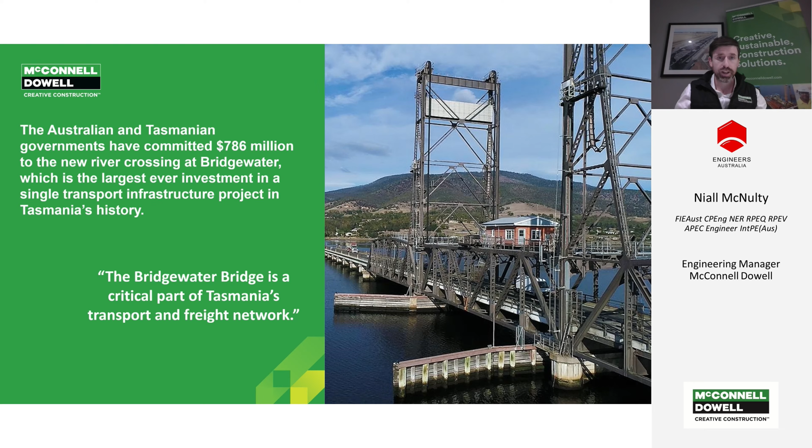So some of the benefits and what the new bridge will bring, it's essentially filling in a missing link where we've got motorway or dual carriageway standard roads on either side of the River Derwent, north of Hobart. And the bridge will create 2 lanes in each direction and have interchanges both north and south of the river at Granton and Bridgewater.

And the features are really to bring the speed up to 80 kilometres an hour from the current 60, a shared path for pedestrians and cyclists to create greater interconnectivity between Bridgewater and into Hobart. The navigation clearance will be consistent with the Bowen Bridge downstream, which will allow for unimpeded access upstream of the river, which is currently not the case. Further grade separated interchanges, the Brooker and Lyell highways, and really upgrading the connection to local highways, off to the west, and the local community in Bridgewater and Granton itself.

So how do we build a bridge? We'll play a short video to really set out how we've gone about constructing the bridge from start to finish. The detail within the presentation will focus on the early part of that story with regards to setting up the marine access, how we've got out into the Derwent estuary, and then how we've delivered the piling works to build the foundations for the bridge. But the video will give a really good synopsis of what the bridge entails, what it is we're trying to do, and how we're going about it.

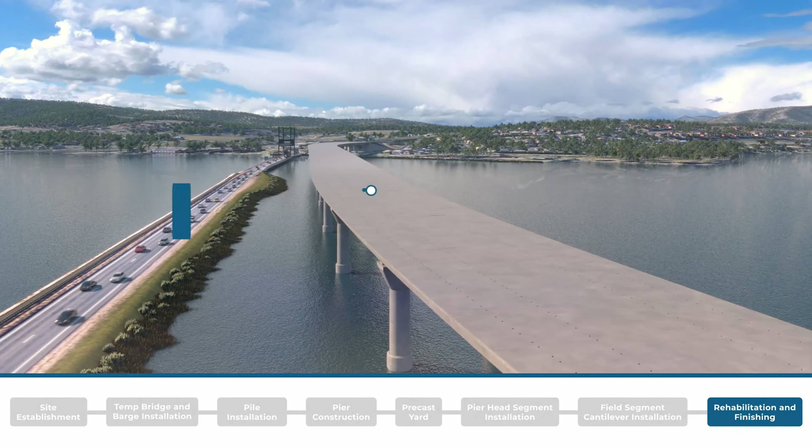So hopefully that video gave you a good overview of what it is the project is trying to achieve. So we'll get stuck into a bit more of the detail around what are the particular challenges that this location and this project have brought to us.

The new Bridgewater Bridge sets out to provide a smooth interconnection between north and south of the River Derwent and connect the communities there inwards into Hobart. Our goals for the project are to maximise that interconnection with local highways, minimise the impact on the existing causeway and the existing road users, minimising impact on the local community in general during construction, and maximising the speed limits as we go through there, keeping the traffic flowing.

Within the Derwent estuary itself, we do have a lot of environmentally sensitive receptors, including flora and fauna, a lot of black swans in the area. Seagrass is an important habitat for the local fish population. So we had set out to construct with as minimal an impact as possible on both the people and the environment in the local area.

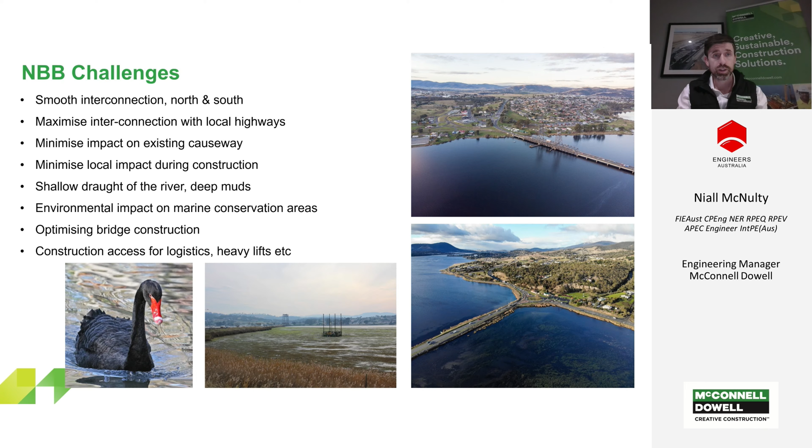There's a view of the Derwent looking to the south. The existing bridge is to the right-hand side. It's a piece of engineering heritage for the country, built in 1947. I believe it was one of the first welded bridges of its kind, and it essentially has a raising and lowering section in the middle to allow marine traffic through.

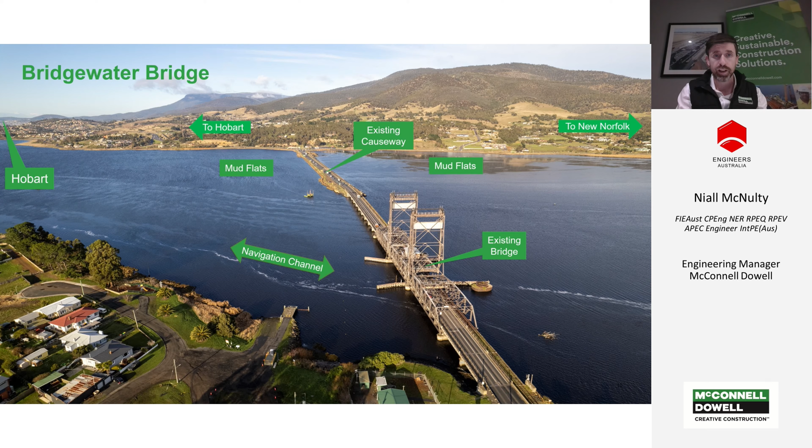You can see in the foreground on the Derwent, it's got a navigation channel which is slightly deeper. The majority of the width is across the mud flats. In the centre of the picture, you can see the change from the bridge structure through to what is a causeway, which was constructed by convicts in the early 19th century. That causeway corresponds with the area of mudflats where we didn't have much draft for construction access with barges and the like.

So I'm going into a bit more detail. This slide actually gives you a bit more of a project setting as to where it is. We're just to the north of Hobart, on the main link in between Hobart and Launceston in the north of the island, and you can see on the schematic on screen that we've got interchanges to the south in Granton.

A smooth curved bridge more or less cuts the corner on where the existing causeway brings the road across the river currently. Then we go across to the northern side where we have the Bridgewater community, which is currently through pass rather than bypassed. Then we connect into the dual carriageway at the very northern end, which heads on up to Launceston.

So you can get a sense of the scale of where the project is and how that link is between north and south, and how we're trying to do that as smooth as possible, which drove the positioning of the bridge, drove the curvature, etc.

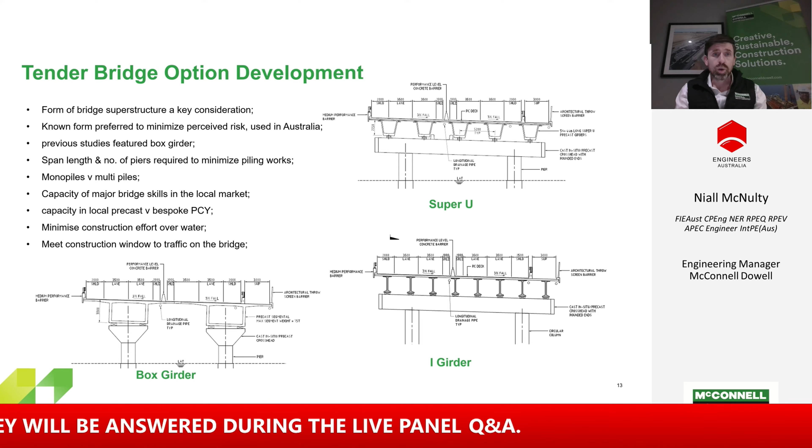So in terms of bridge option development, I'll go through some of the thinking that we had from the early days in the tender period through to the ECI, and really the crux of the job being the bridge driving everything around it. We really set out to look at what sort of form of bridge we wanted to construct in this area, understanding all of the geographical context that we were dealing with.

So we did narrow it down to more or less three main options: a super U, an I girder, and a box girder. The schematic gives you a bit of a flavour of the differences between them. The super U and the I girder primarily relied on having a headstock on top of the piers, whereas the box girder is more than likely going to be on top of monopiles that are independent of each other.

So we had to look at what has been done recently in the market in Tasmania, with a real Tasmanian focus. What sort of skills are in the market? What could we deliver in the local market? And where else within the country could we bring in skills from? Where were there Australian examples of these types of bridges that have been done well in similar estuarine environments or wide river crossings?

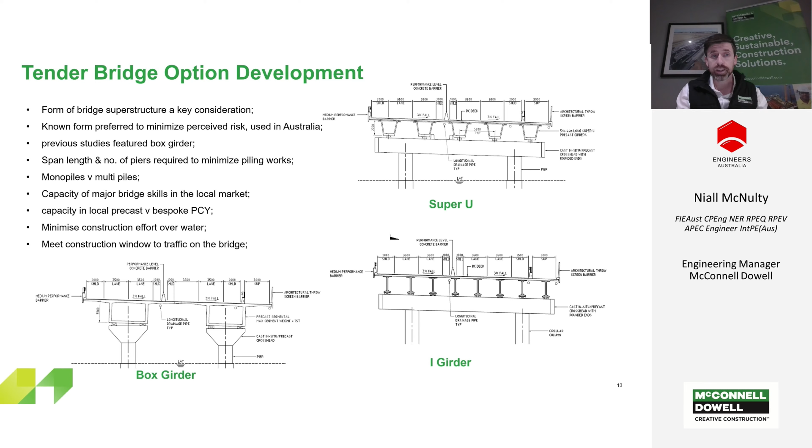Really our goal was to minimize our construction effort over water, and meet the construction window for traffic on the bridge, which was relatively tight.

With the Super U itself, we did have some Australian examples where it had been done well. It is relatively simplified, but the lifts were heavier, around 175 tons. That meant we'd probably have more piers, which meant more piles, and our piling risk was certainly increased.

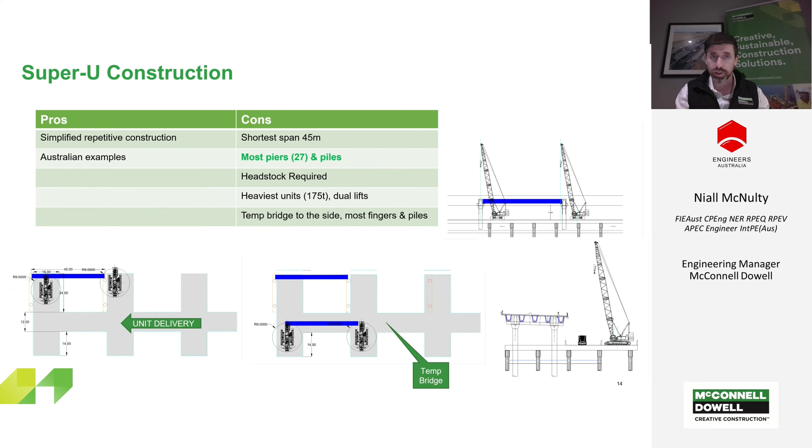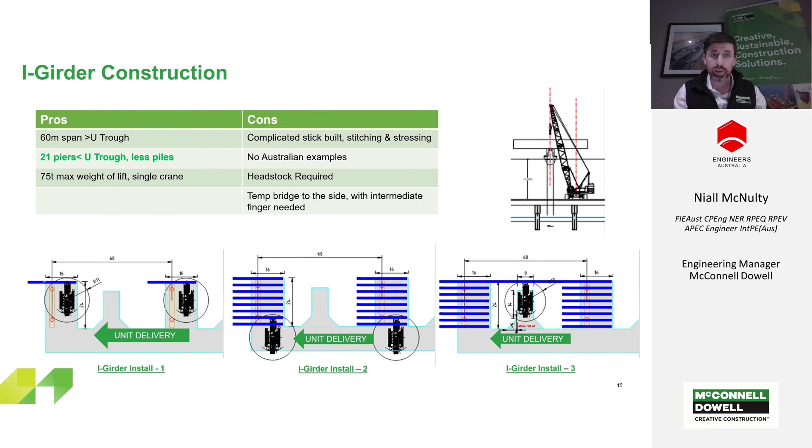With the I girders, we were able to get a larger span, so we reduced the number of piers from 27 to 21. That meant less piles, but we did have potentially a lot of work to be done over water with the superstructure. So from a piling perspective, this was the direction we wanted to go in, but we did feel that the superstructure was probably going to be more complicated than we wanted to entertain.

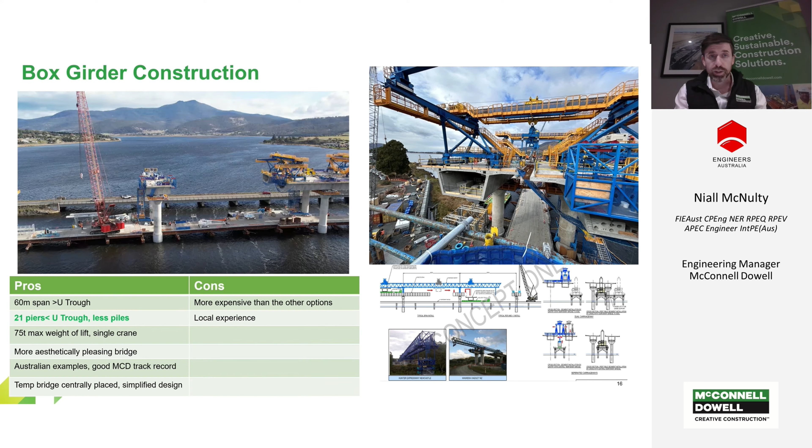So we were keen to push this along. It may have been more expensive, in the cons, but it was something we felt we had a better understanding of the risks around. The piles were potentially a bit larger, but we had less of them overall. This was going to be a monopile solution—it didn't require that we had multi-pile and complicated headstocks or complicated pile caps in the water. So we went with this solution, pushed it to the fore.

Piles were going to be long. The pile cages were going to be heavy and complex, requiring multiple lifts. So the ability to construct from something that was, let's say, a fixed platform that minimized the interaction with, or the limitations imposed by, tides was going to be a key factor in defining how we were going to get out and actually construct these piles and piers.

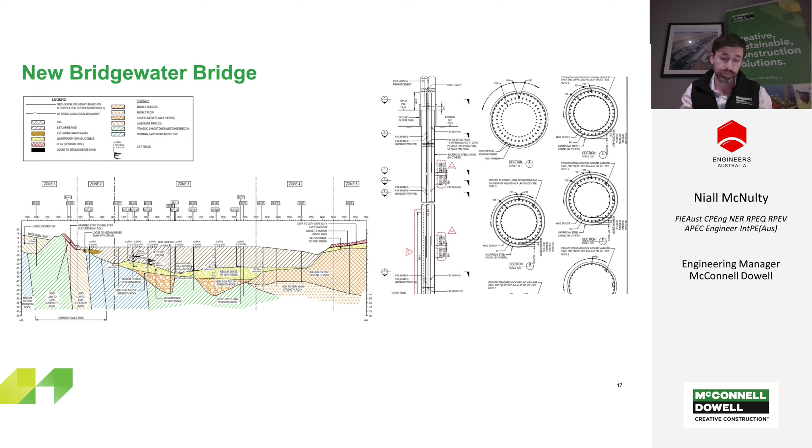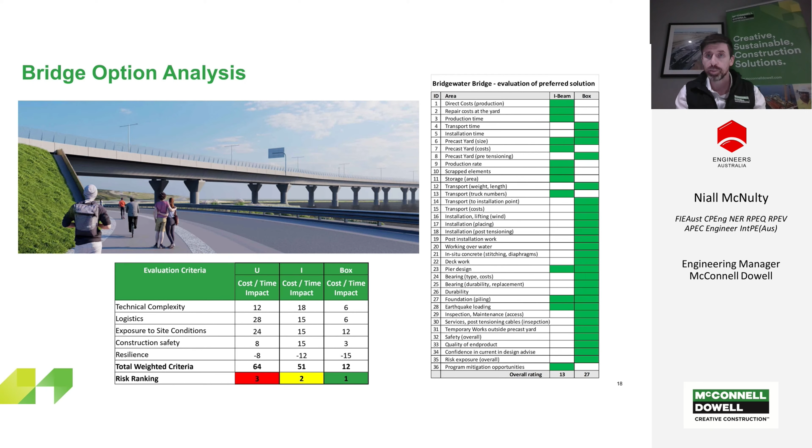Even though it may have been slightly more expensive up front, in terms of a risk profile, as a project we felt we were much more comfortable in understanding how we were going to go about it. We felt we understood the risks much more—it was a known quantity in terms of a solution, whereas the I girder was more than likely going to result in much more work over water and exposure to personnel, and potentially result in more piles if we were to minimise the pile size, whereas the box girder allowed us to have a fairly consistent pile size, translating up into the pier that you can see on the screen there.

So in terms of marine access or riverine access, really, how did we go about the construction, and how do we intend to be able to deliver our piling, which Toby will go into in more detail in his presentation. The approach for the project is really to work with nature rather than against it.

Understanding that the big limitation was the presence of the mudflats and the impact that tides would have, we understood we weren't going to be able to take a traditional barge construction approach with floating plant and a load-out platform. On the northern and southern sides, we didn't have a lot of real estate to build out load-out platforms or lay down areas.

So what we came up with was a solution using a temporary bridge on the northern side, going across the river channel where it's deeper, giving us a solid platform not impacted by tides. It's essentially the same length, about 365 meters, as the existing bridge across the navigation channel. That is interlinked with a series of 12 barges, two sizes, to fit between the piers, which are themselves interlinked with a bridge in between to allow continuous access.

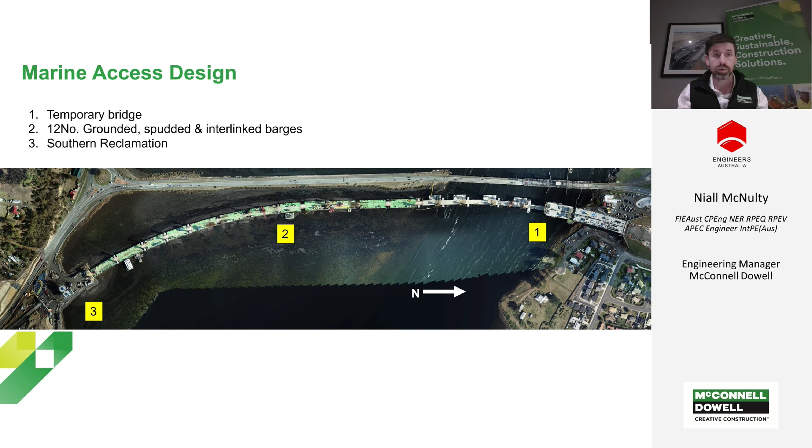The temporary bridge gives us fixed, all-weather access, so no impact from tides, and it minimizes the impact of weather because we're not working on a barge, potentially having to account for barge movement on cranes, for example. So it really gave us surety of logistics.

It could interlink between the north and south. We have the option of going round on the local roads, but if we need to open up access from north to south, we can certainly do that. It gave us more flexibility in that sense.

In terms of stability for the heavy piling equipment, we're utilizing a 400-ton crane because we're talking about significant pile casings, 2.5-meter diameter, 50 tons, to get down through those soft sediments. The pile cages themselves at their heaviest, with the final lift, are over 100 tons sitting within the pile, so we had significant lifts and wanted to maximize construction safety.

It's a lot easier to work off a fixed platform, something nice and solid with space on it, than working off floating plant. And really, it maximized program reliability.

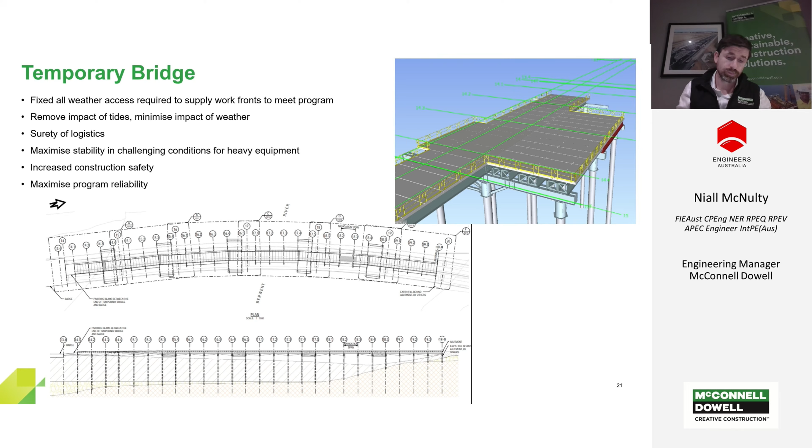As you can see, it's positioned across the navigation channel, spanning 36 spans of the temporary bridge altogether, based on about 13-meter spans themselves.

We needed to understand how we could keep the river open, so we had to set it to a height where river traffic could actually pass underneath it. There isn't that much river traffic, but for the duration of construction, punts can still go through as required for local fishers, keeping that open.

We positioned it within the piers, more or less along the central line of the roadway, because that meant we could maximize the capacity of our cranes for our piling and pier construction.

If we were out to one side, like some of the early examples or options we had looked at, you needed bigger cranes, harder to source in the local market, and then you probably needed to increase the size of the temporary bridge again, because you're chasing capacity for a much higher load.

The constructability of the temporary bridge itself was absolutely key. In terms of program, we needed this to be something we could install as quickly as possible, and we worked closely with our subcontractors in Tasmania to work through the fabrication and installation challenges to make sure we could get that in there to meet the program.

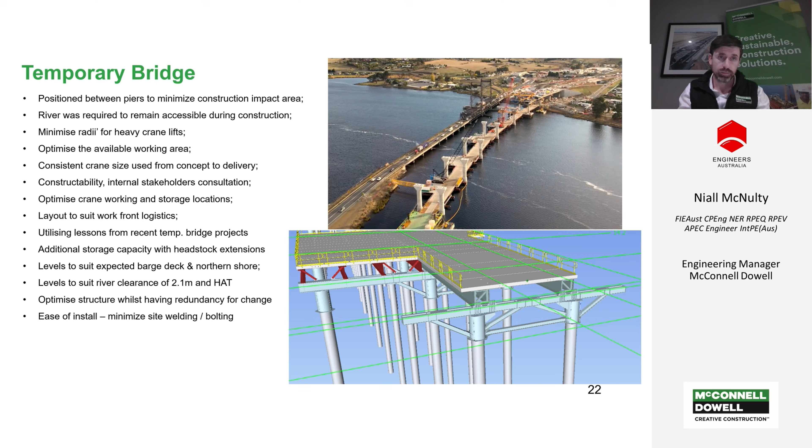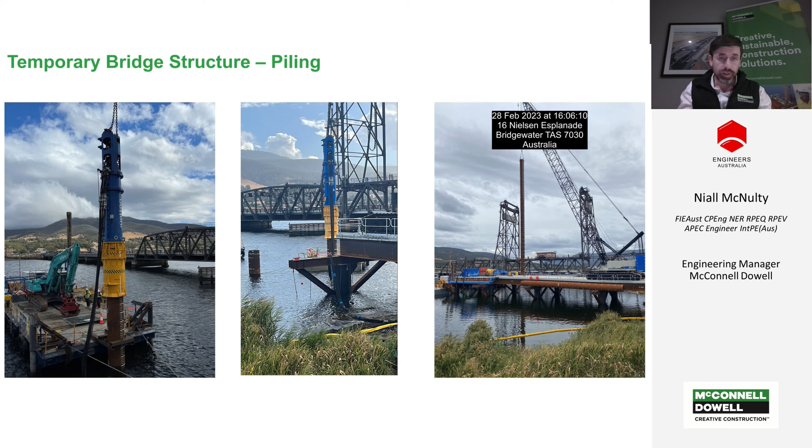Just some shots of the temporary bridge being constructed as we piled out from the northern side with 1050 piles. The piling was undertaken really before we had fully finished the site investigation, so we were establishing what sort of geotechnical risk we actually had on that northern side, which did help feed back into the design of the permanent structure as well.

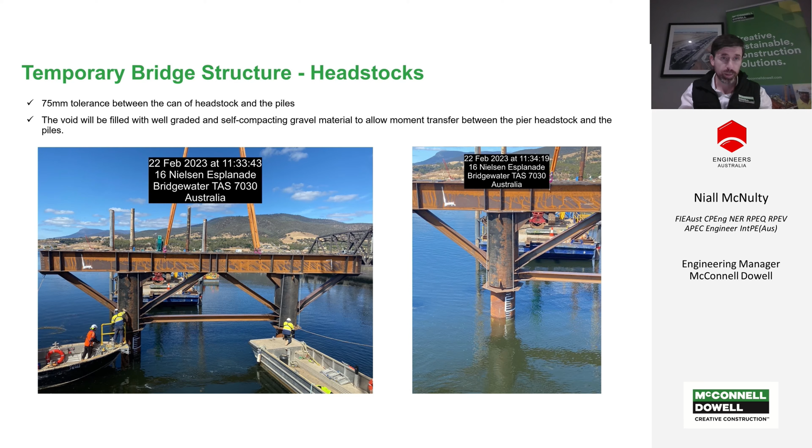Some shots there showing the headstocks being lifted into place, slotted over the top of the piles, and the cans essentially filled with gravel to lock them into place. You get a sense of the scale with the people there in the work punts position. It's not a small structure - essentially Tasmania's biggest bridge that's been built

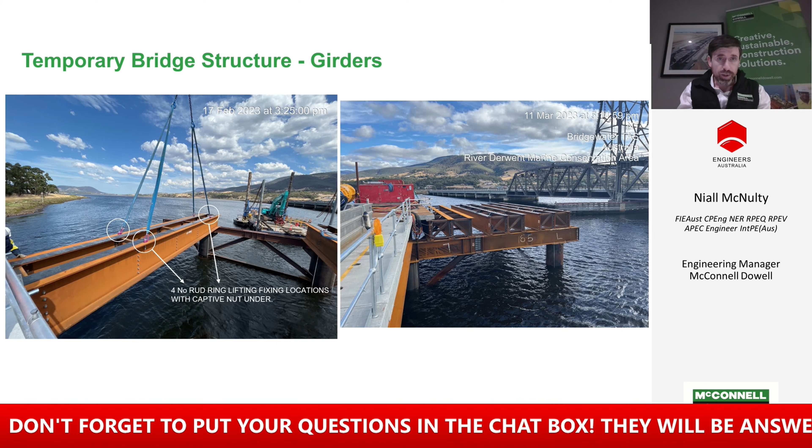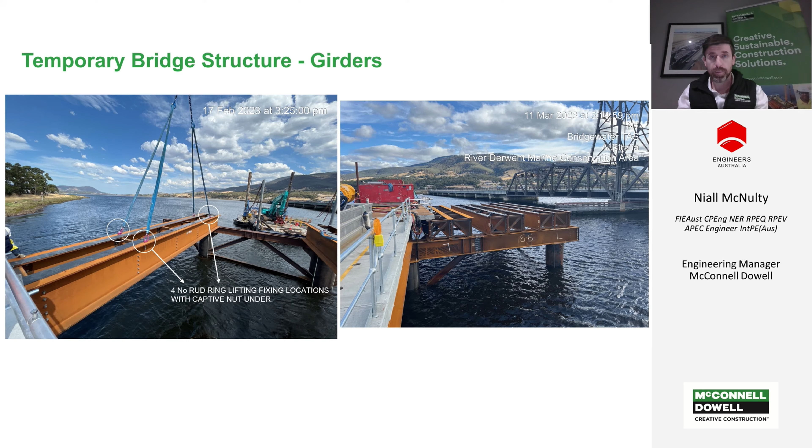in probably 40 years. So these are the crane beams. The bridge was optimized, obviously, to take account of how we were going to do our piling operations or our pier operations, where we would have most of the loads just from the cranes located over the top of the steel structure that would run down the side, transferring that into the piles. On the photo on the right hand side, you see much heavier structure on the storage bay or the crane operating bay, where there was potential for spragging, for example.

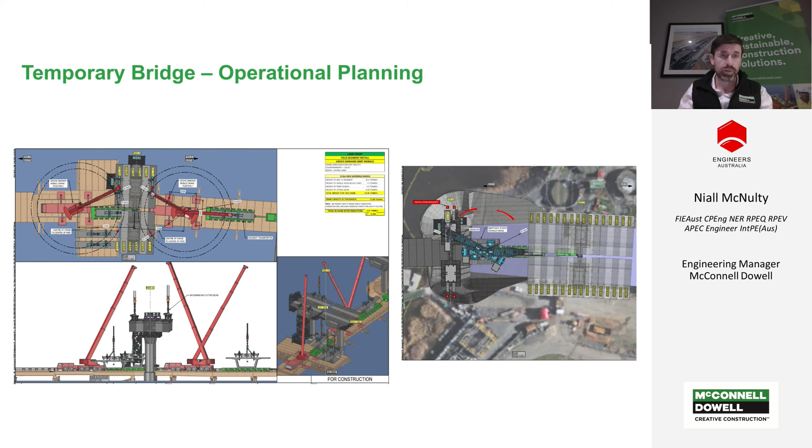So as we were devising the temporary bridge design, we spent a lot of time across all of our operations in the superstructure, our piling, our pier construction, to bed down what was the best configuration of the bridge, what size it needed to be, how well cranes could operate on it, how logistics were going to operate on it, and run that through a series of workshops. We took on board the feedback, and then that was fed back into our temporary bridge design to optimize it.

So to the south of the temporary bridge, we had the barge causeway - a pretty interesting way of utilizing barges, certainly in the number of barges that we had. We ultimately designed 12 bespoke barges of two sizes, shown there, designed to operate as a normal barge in an unrestricted RINA class, and designed for floating and grounding operations. So in that sense, we looked at thickening up of the hull, the bottom hull, for example, in case there was the presence of

tree debris or something like that sitting in the top of the river muds. So we basically wanted flexibility so we could float materials up the river as part of the construction delivery phase, and then we ballast them into place. If the barges ended up floating, we also designed them so we could continue operation in a standard barge operation regime, less than 2° inclination when floating, with the same applying when grounded. That was taken into account with the sizing of our crane.

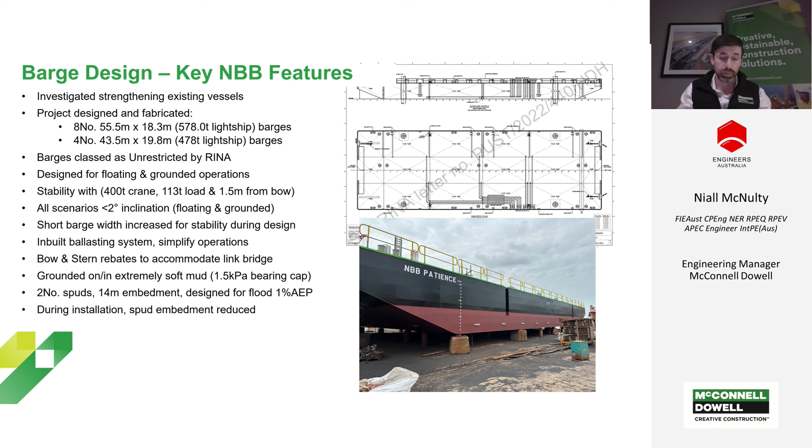Could we essentially put water ballast into the barges to sit ourselves down in the mud, minimize any displacement, but settle the barges in slowly, and then gradually squeeze water out of that mud and get to a point where the barges would still move, but they wouldn't react like we're in water. They would be much more stable.

So even if we're sitting at the bow of a barge or quite close to the bow and lifting over the side on an angle, the ability of the mud to react in that scenario when it's being compressed and squeezed underneath the barges - it reacts much slower than it would if you're lifting in water. So we were able to get higher capacity out of our crane.

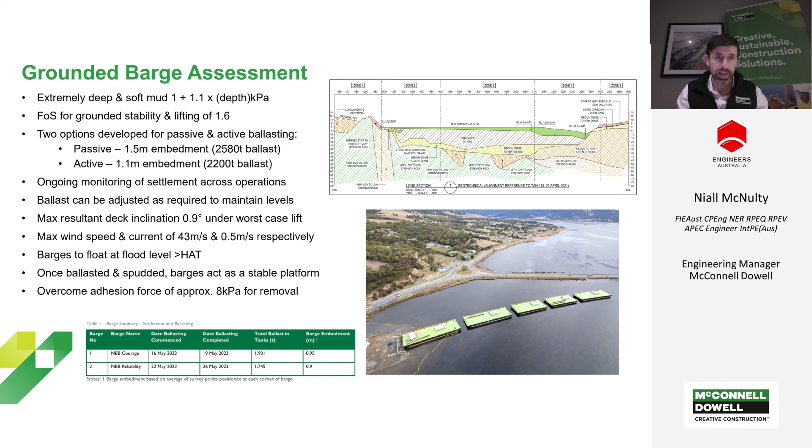That meant we could push the scale of the piling operations, for example, with those cages and what we could lift with the cranes that we had. All interlinked and playing off each other in terms of capacity and what was in the permanent works and the temporary works.

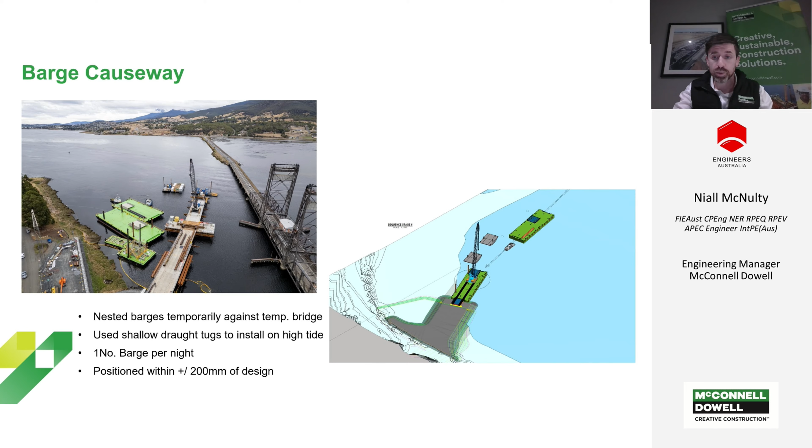A brief shot here showing the beginning of the construction. On the right hand side it shows how we intended and planned to bring the barges in and push them in against the reclamation. They were brought in on the high tide, put in place, and then we started filling them with water once they were in the right position, surveyed them relative to the piers, and we pretty much achieved a positioning of plus or minus 200 mil within the design, which was fantastic.

The link bridge design then sits in between them, so no point having the barges if you couldn't actually walk between them. This allowed not only for walking between, but ultimately this is what we did our piling off. So we needed to get as close as possible to the pile location.

Use the BG45, which is shown on the right hand side there. The bridges themselves we designed in house, fabricated in Batam, and brought them over, and then we did further reassessments to understand what we could do to put heavier loads on them, like the BG45. It wasn't initially designed for that, but we essentially re-engineered, put some other controls like crane mats on top of these, and that meant we were able to use them.

But this allowed then, as the operations progressed further and further out into the river, you still had a full access width for deliveries for concrete trucks, spoil trucks from piling, pile cage deliveries, etc., to access the piling front.

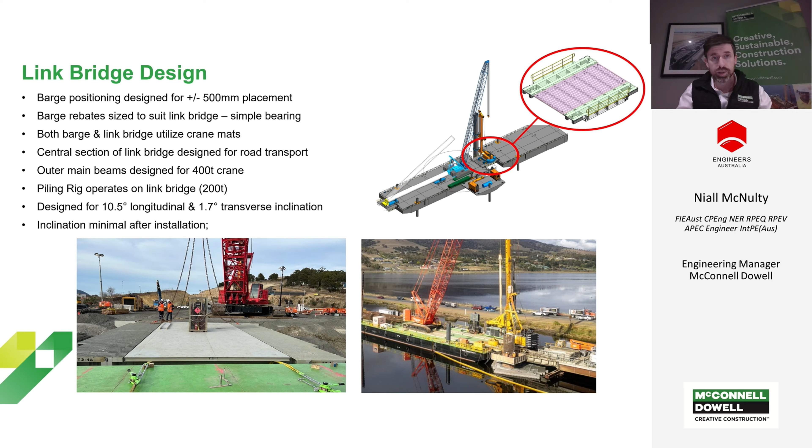And once it's in operation - Toby will go into that in a bit more - but certainly when seeing it in action, a bit of a logistical triumph to be able to bring so much material and remove material from the piling, in and out off the barge causeway.

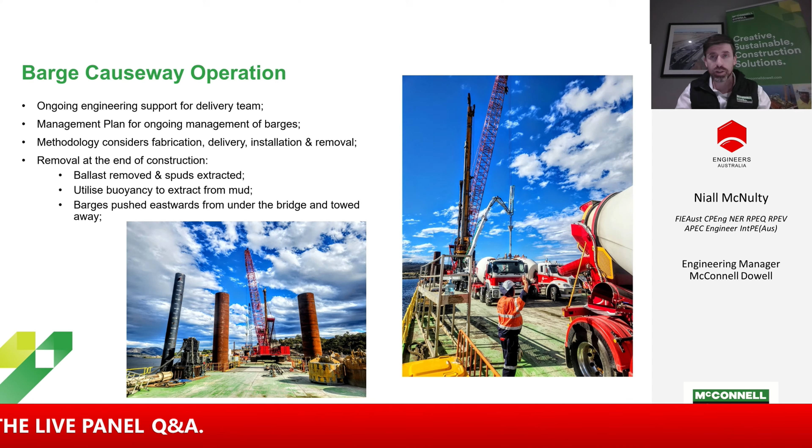Required complex control. You can see on the right hand side staging of concrete trucks in a very tight space. It looks like a big area of real estate, but once you see a crane on it, there's not a lot of space actually left for operating.

And at the very southern end, essentially a project in and of itself, but where we couldn't fit in an additional barge, we always needed some area of strengthening to protect the existing seawall on that southern side, which is essentially a crumbling dry stone wall along the existing rail corridor.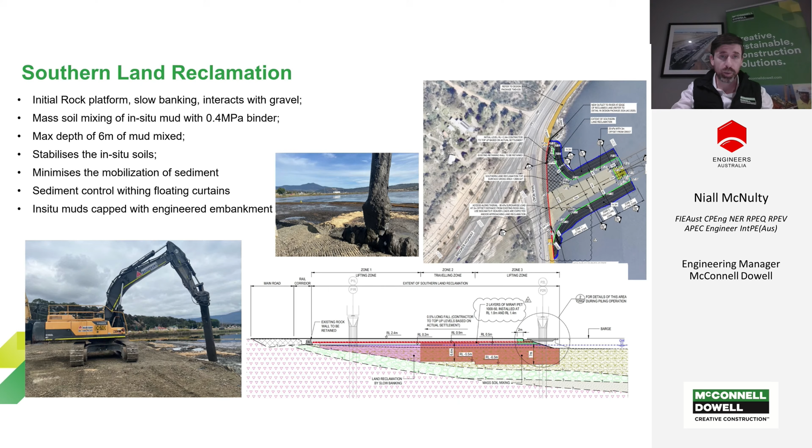So again, working with nature rather than against it, we sought to stabilize the in situ muds by using mass soil mixing, applying a binder, and putting sediment controller around the outside. So progressively working our way out from the shore.

The middle photograph shows the plinth where we'd land our link bridge to transition from the reclamation onto the most southerly barge. So again, high point loads in there, a much stiffer foundation to put in on those plinths - precast plinths sitting on top of those timber piles.

And in the area of highest crane use in the center of the reclamation, we also use some timber piles to just push down through the MSM and make connection with the gravel layers underneath.

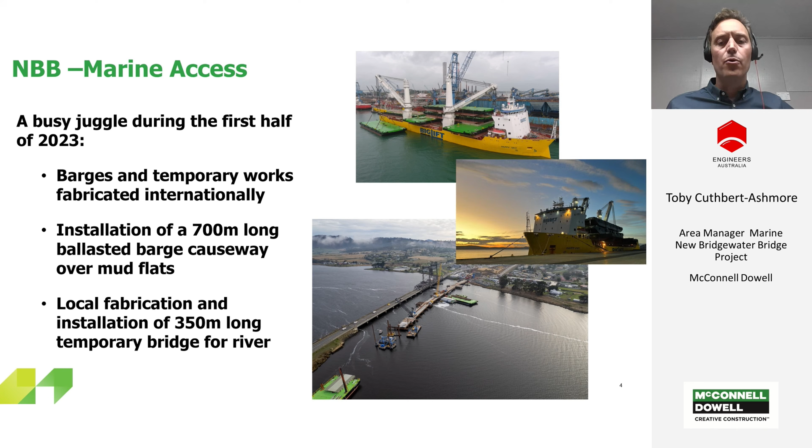Hobart is a really vibrant and exciting city with a nice size and scale. Part of what I've enjoyed about the project is seeing how the whole city operates, from the port to the roading infrastructure, and even working around the shipping schedules of cruise ships and Antarctic supply vessels that frequent the city.

This photo nicely shows the scale of the barges and heavy lift ship, dominating the surrounding city skyline. Works of this nature were relatively new to the Tasports team, and while they may have raised an eyebrow at the interesting stacking arrangement of the barges on the heavy lift ship, they did an excellent job working with us to get the barges and equipment offloaded at the port and safely up under the Tasman Bridge into the worksite on time.

Just an overview of the piling scope of works - this is what we had to deal with. There were 46 monopiles over the length of the bridge. The term monopile really had a lot of resonance with everyone involved, and everyone was very aware that we would only get one shot at getting these right.

The piles had a steel casing of 2.5 metre diameter and 25mm wall. The end 1 metre was a pile shoe of 40mm thick steel. The pile casing extended down to the top of the rock layer, sometimes 45 metres below the ground, with a bored rock socket continuing below the toe of the casing. The rock sockets that needed to be bored were 2.38 metres in diameter, with the deepest sockets up to a depth of 45 metres from the toe of casing.

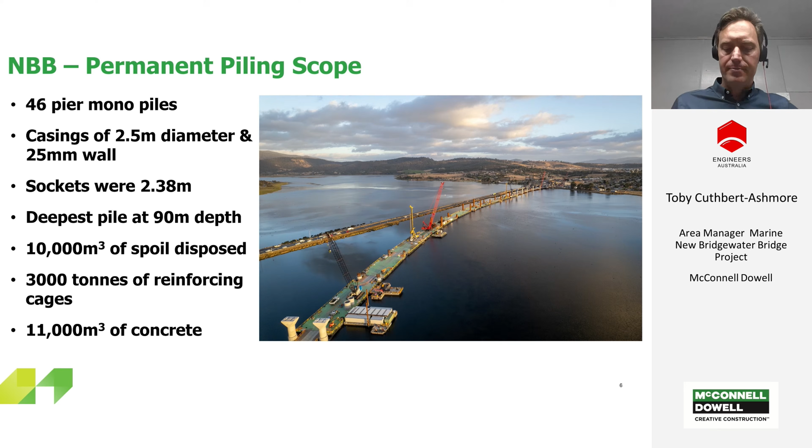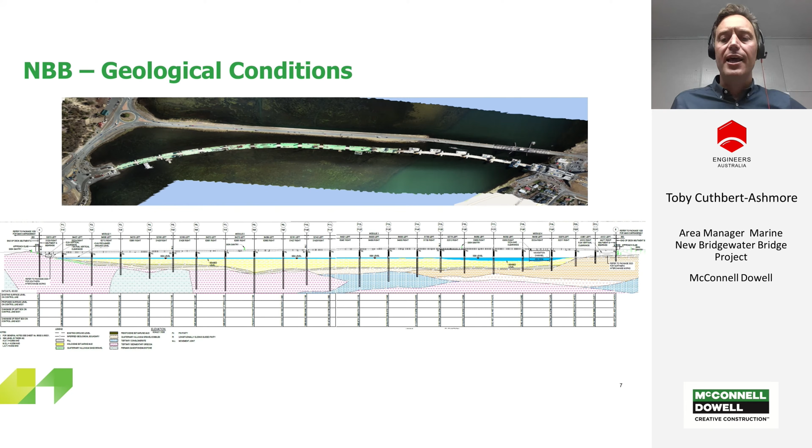The ground investigation for Bridgewater was very thorough, including a 6-month campaign with 4 borehole rigs and 4 barges at its peak. Shipping containers were filled with all the different borehole logs, with designers and McConnell-Dowell alike analysing the details. Every pile location received a detailed borehole log of the geotechnical conditions, which was highly beneficial when performing the piling works, as we generally always knew what to expect.

This slide quickly details a summary of the different conditions and types of piling experienced across the job site. All the piles had up to 30 metres of soft and contaminated marine muds overlaying the more competent material, and this was dug out with drill rigs and sent off site for treatment.

On the north bank of the Derwent, the geological conditions were good, with piles between abutment B and Pier 20 going between 13 and 26 metres into good high-strength basalt. Piling would be conventional land piling, using the BG45 rig. The northern third of the piers maintained these good rock conditions in basalt with piers 21 to pier 13. Some rock conditions even potentially got up to 200 MPa, with only a couple of 100 millimetres drilled every hour. Piling would be done in the marine environment, with the BG45 operating off the temporary bridge.

The southern river piles between Pier 14 to Pier 2, about two-thirds of the river, had the really concerning material - cobbles and gravel layers above low-strength breccia, clay, siltstone and sandstone. Geological conditions were highly variable, with differences of up to 25 metres between pile lengths, even at the same pier only about 13 metres apart. This was reflective of the river valley and the tumultuous manner in which material had been deposited over the millennia.

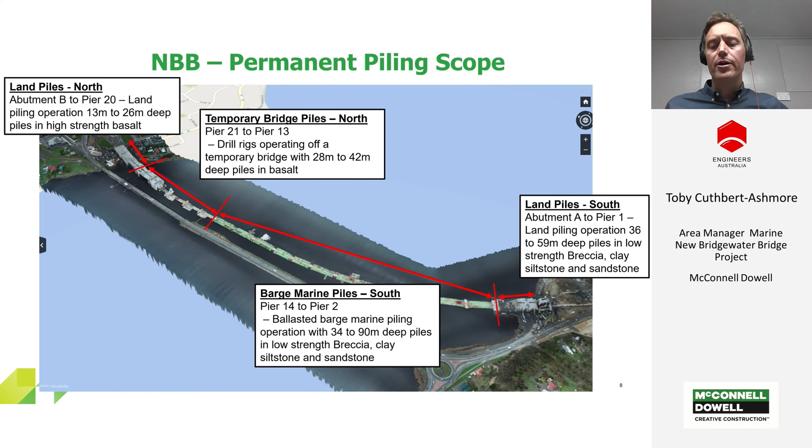To really emphasise the challenges of drilling and the variable nature of the ground conditions, particularly on the southern two-thirds of the river, this is the borehole for the deepest pile at Pier 8L. You can see from the borehole, in the space of 10 metres, the ground conditions go from weak sandstone to breccia, with some core loss thrown in, then to sandy clay, then more core loss, then more sandy clay, and then back to weak siltstone. The photo on the right shows the borehole at the toe of the P8L pile and the challenging looking material that was going to be at the toe of our 90-metre biggest pile. It's fair to say we all had a few sleepless nights thinking about the upcoming challenges.

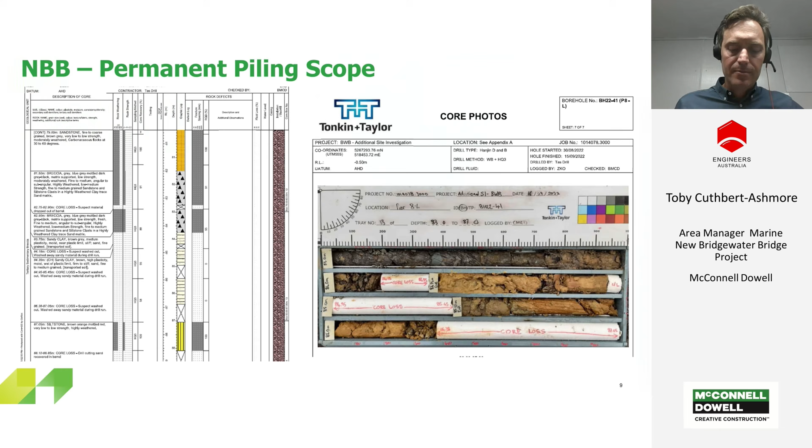One of the most interesting pressure elements of the piling works was the test piles that had to be completed to validate the designer Tonkin Taylor's assumptions. In the next few slides, I'll cover the test piling process and an unexpected addition that popped up.

3 test piles were required, split across the 3 main geological zones of the project: one on land in the good basalt conditions of the northern bank of the river, one on land on the southern side in the marginal conditions of siltstones and sandstones, and the final one in the middle of the river at Pier 8, in the clays and breccias.

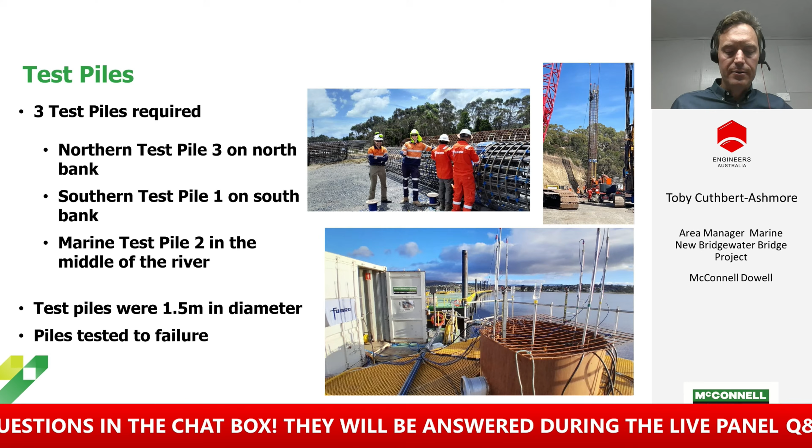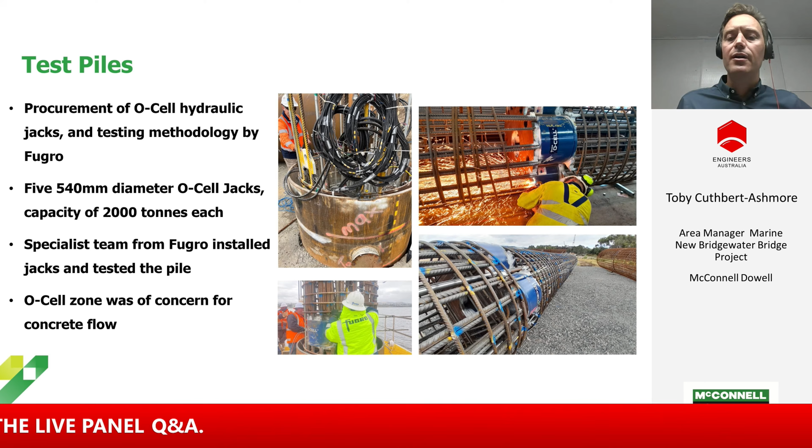The test piles were 1.5 metres in diameter, installed using the same methodology as the permanent piles. They were tested to failure using hydraulic jacks cast into the piles, known as Osterberg cells or O-cells. Five 540mm diameter O-cell jacks, each with a capacity of 2,000 tonnes, were installed at the point of equal capacity in the pile, with a thick steel plate sandwiching the top and bottom of the jacks to evenly distribute the loads and push the top section of the pile up and the bottom section down.

The procurement of the O-cell jacks, along with the testing methodology and know-how, was arranged through Fugro, who supplied a crack team of specialists flown in from Singapore and the Philippines. They first installed the jacks to the pile cage, then attended site when the cage was installed to connect up the hydraulic lines. After the pile gained sufficient strength, they returned to perform the pile testing and record keeping, pressurizing the jacks and pushing the pile to failure over almost 24 hours.

The area around the O-cell was highly congested with reinforcing steel, plates, and the 5 jacks, raising concern about concrete flowing through this zone and avoiding voids above and below the O-cell location. Fortunately, with good quality concrete from our supplier Hazell Brothers and a great job of placement by the team at Cape Horn Piling, this issue did not materialise.

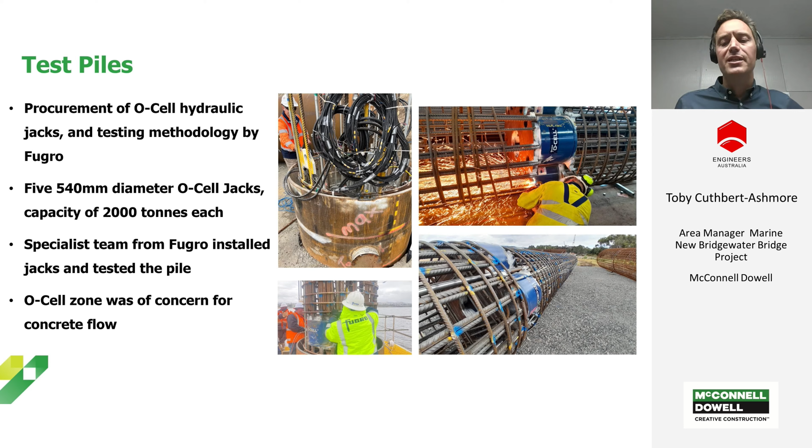Unfortunately, on the third and what was thought to be the final test pile, there was an unexpected concrete loss through a zone of unusually weak conglomerate during the pour. The pile ended up taking about 50% more concrete than originally calculated. Standing out on the barges at 6pm on a Friday evening, watching the concrete level in one of your precious test piles dropping, is a situation none of us wanted to be in.

A decision was made to complete another test pile before Christmas 2023. Procurement and program challenges abounded, with the team facing Thanksgiving holiday issues, getting jacks out of America, and trying to complete the pile before Christmas. Thankfully, we got across the line, pouring the last test pile on Friday the 22nd of December. Testing was successful, with all required loads achieved, and the design subsequently signed off in early 2024.

Now I'll focus more on the construction and methodology of building the works, from getting the steel casings on site, installing and drilling them out, to finally concreting and completing them. Once again this will be a high-level pass, with an opportunity for questions on more detailed topics at the end.

The steel pile casings for the job were manufactured in China, with the team from McConnell Dowell's Shanghai office doing a great job looking after international procurement. A ship was chartered to deliver the piles directly to the port of Hobart, where they were unloaded and stored until we were ready for them on site.

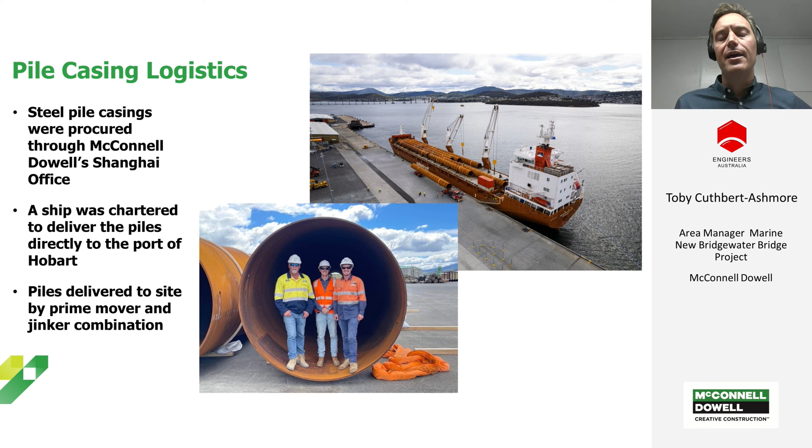Here's a nice photo of our engineering team displaying the size and scale of the 2.5 metre diameter casings. A local subcontractor, Gradco, had the unenviable job of moving these monsters safely from the port through the city of Hobart and up the highway to our job site. Moving piles of this length in one piece is relatively unprecedented, and the fact that the Gradco team did it quietly, safely, and without incident speaks volumes.

Just to really put it in perspective, here is our largest pile casing at 48 metres long, framed beautifully by the stunning mountain kunanyi in the background.

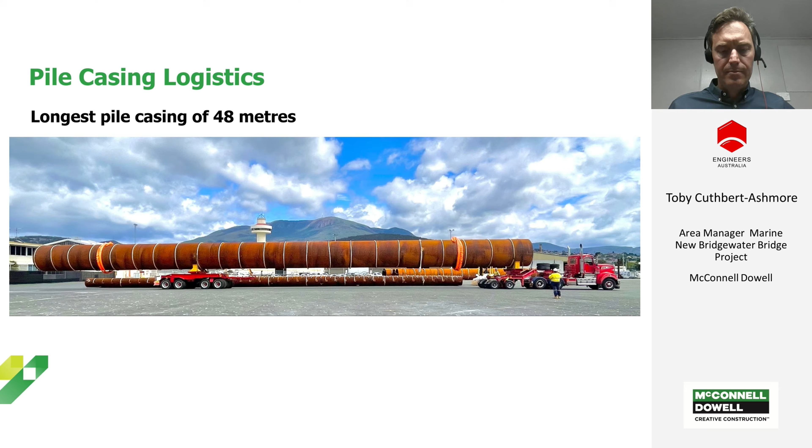Getting such large piles on site, manoeuvred where they needed to be, and then vertical and installed was one of the first logistical challenges to overcome. It was easy to be overwhelmed by the scale of the casings and the size of the problem.

Fortunately, we had a very strong logistics manager named Mark Howell, coupled with another very strong local senior project engineer named Sam Green, and they came up with simple and effective solutions. Going back to the basics of lift planning and engineering, they spent time on site working with the supervisors and crane operators.

To safely single and dual pitch all the steel casings, the BG45 rigs utilised a piling gate or frame attachment to support the upper length of the casings and keep them safe and vertical until they could be satisfactorily driven to depth with a vibro hammer.

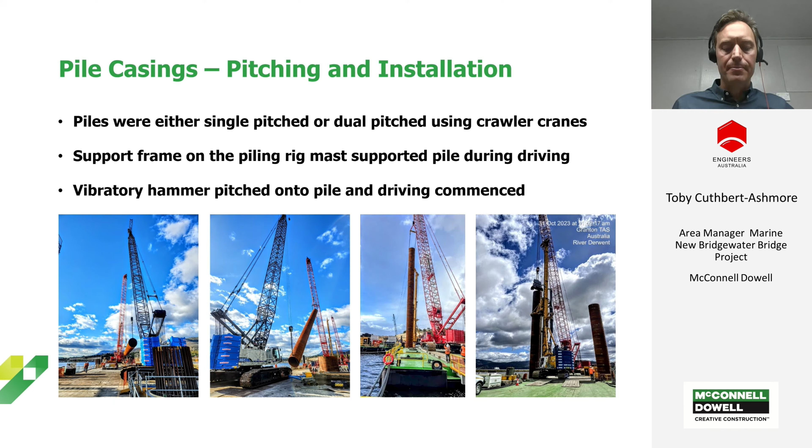Here's another one of my favourite project photos, a drone capturing an action shot of the two cranes performing a pile dual pitch with the Derwent River Valley and kunanyi Mountain looking dramatic in the background.

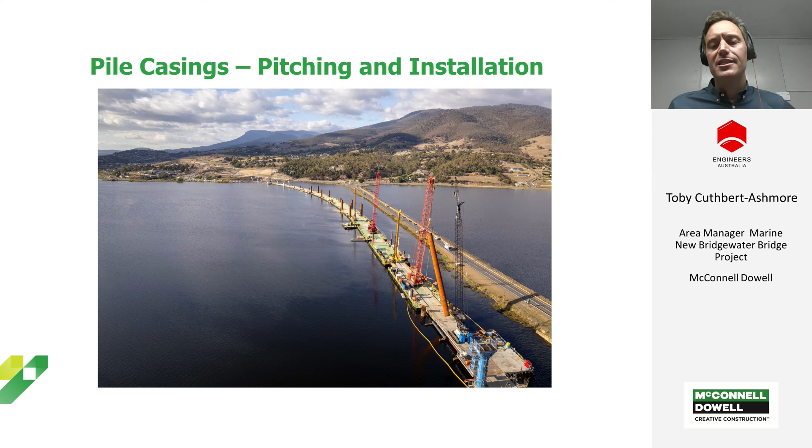Bridgewater may not be in the Lonely Planet list of places to visit in Tasmania, but it really is beautiful and visually stunning. In the mornings and evenings, the sunrises and sunsets are spectacular. However, in the colder months, the weather can be absolutely unrelenting, with howling winds, thick fogs, rain and sleet, all funneling down the river valley towards you out in the open. None of this is particularly helpful for large crane work and high-risk lifting.

For some of the more stubborn piles on the job, and particularly the longer steel casings, using drill and drive techniques with the BG45 rigs and vibro hammers wasn't enough to get them down to the required toe level. To achieve the result we needed, we mobilised McConnell Dowell's S280 impact hammer to drive the casings down to their final depth.

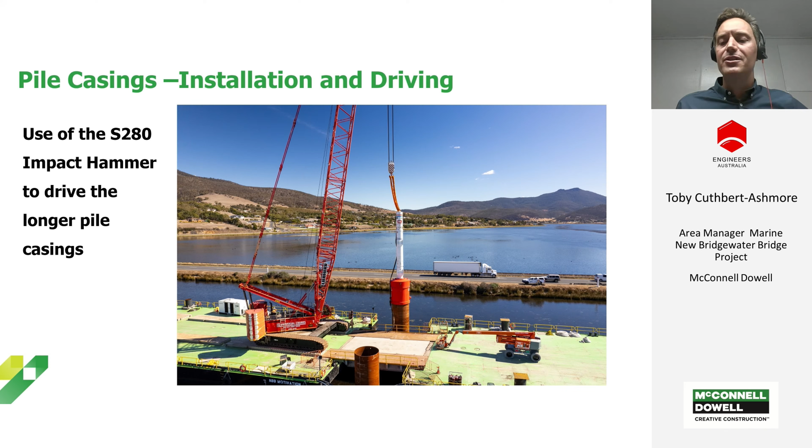The 2.5 metre diameter sleeve had to be specially mobilised and hired out of Holland. Here's a good drone shot of the hammer in action. While logistically getting this enormous 70-ton hammer set up and then moved around site was a major headache, I think the team liked the fun of using one of Australia's biggest impact hammers on some of Australia's biggest piles.

As already mentioned, for drilling out the pile casings and then the rock sockets, the Southern work crew utilised a BG-45 piling rig, positioned on the temporary works link bridges that ran between the ballasted barges. Access platforms were welded on at different levels, one at barge deck level to aid in spoil capture and pile checks and inspection, and then an additional platform later, prior to the concrete pour, to provide access to the tremie.

The rigs used rock and clay buckets on the end of telescoping Kelly-bars to drill out the casing and rock sockets. The material removed could differ greatly in nature, from the sulphur-smelling past muds to the clay-like remains of the drilled breccia and siltstone, and then finally the gravelly remnants of the higher-strength basalt on the north.

The engineering and site surveillance of the piling work was robust at all times, with TNT supplying a geologist to monitor all pile arisings and confirm against the borehole log. An independent verifier had a separate engineer confirming TNT's checks, along with a strong engineering team of McConnell Dowell and our subcontractor, Cape One Piling.

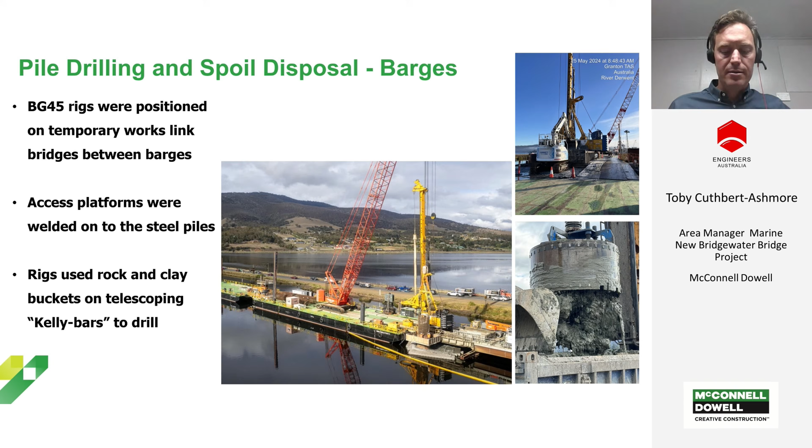Similar plant and equipment were utilised for constructing the piles from the temporary bridge. The Northern work crew utilised a series of steel mats to strengthen the temporary bridge below and to support the drilling track pressures. The same sequence of temporary platforms supported on the steel casing was also used. Additional plastic segmental pontoons were implemented to stop any risk of spoil dropping into the Derwent, along with enviro controls of booms in the water.

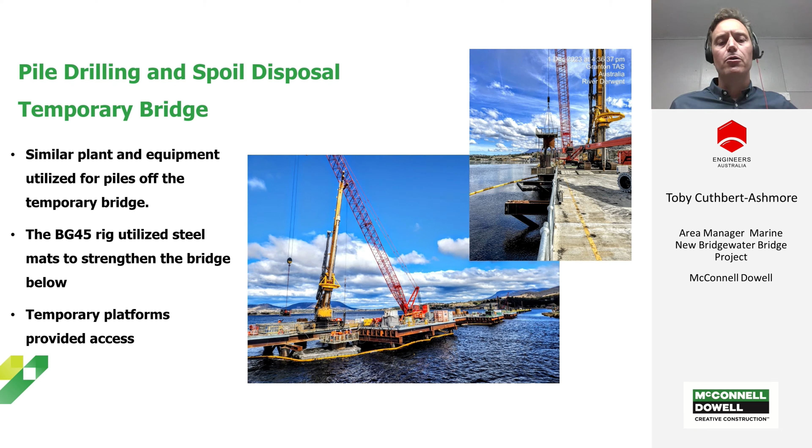The depth and size of the piles meant that the piling rigs and other related equipment were working right at their limits. Kelly bars required constant inspection and repair throughout the work, as the high stresses and loads on them resulted in fatigue and damage. This was a particular concern at the end of the different stages of the bars. Agitator pumps used to clean out the base of piles were also an ongoing concern, struggling at the great depths.

The depth, time taken to get to the base of the pile, and the size of the equipment was also problematic. While we had backups for backups on site, even just changing over a Kelly bar or a broken down pump could take hours. The team were always focused on preventative maintenance and keeping the gear in the best condition possible.

Maintaining the stability of the drilled socket was always paramount in everyone's minds. The fear of having an unsuccessful monopile that could then result in more piles and potentially a pile cap loomed large. Polymer drilling fluid was used in the weaker ground conditions of the southern piles from Pier 13 south.

The polymer product supplier chosen was KB International, with the polymer having distinct improved environmental impacts over alternatives such as bentonite. The piling and engineering team leapt to the challenge of achieving the highest quality polymer possible, with our engineers and supervisors becoming amateur chemists, adept in the knowledge of pH and viscosities.

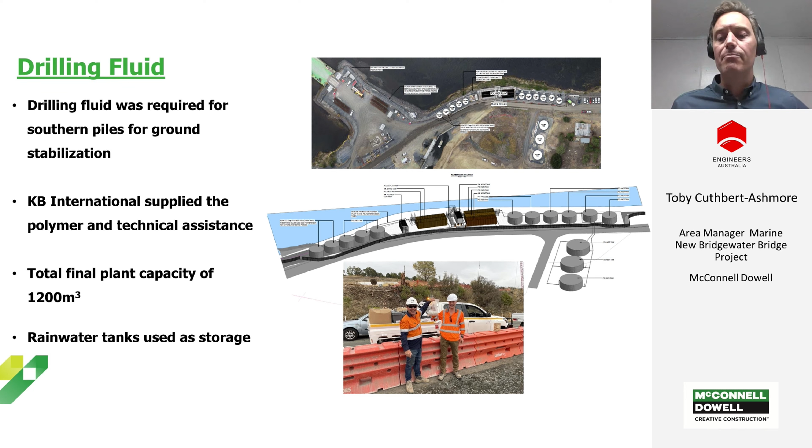Reinforcing cages for the project were manufactured locally in the north of the state by the subcontractor Bridge Pro Engineering. In total, 3,000 tonne of reinforcing cages were fabricated. Bridge Pro have many abilities, but making cages of this size and nature is unique and did come with a big learning curve.

I think at one point in time, it seemed like they employed all the boilermakers in northern Tasmania to keep up with the fabrication and enormous amount of reinforcing welding required. 3D modelling, good drawings, and a simple production process was key in getting success, and by the end of the works, they were pumping out cages well ahead of schedule.

To say the cages were absolute works of art is an understatement, and given their size and intricacy, they really did go together like Swiss watches.

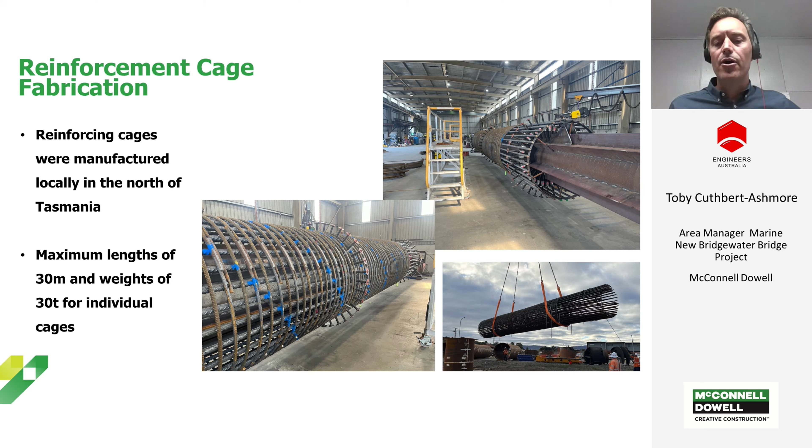For the longer piles, the reinforcing cages had to be joined and spliced on site, with the standard reinforcing bar size being supplied in 18-metre lengths. Double rings of longitudinal reinforcing bars meant that site splicing and installation was very complex.

The total final lengths of over 90 metres for the longer cages required the 6 cage sections to be delivered, pitched vertical, and then spliced and installed over the pile hole. The installation method was constantly improved to the point that all 6 cages and 90 tonne of reinforcing could be installed in a pile in a single day.

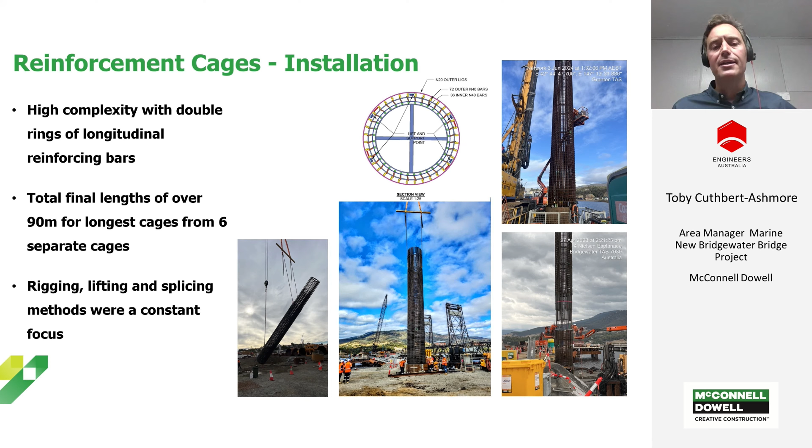Once the reinforcing installation was complete, the pile was checked and confirmed as still being clean and stable, and then the OK given. The concrete was placed via tremie pipe to the base of the pile, with the polymer fluid displaced and pumped back to the tank farm from the top of the pile.

Concrete pours were large and often over 400 cube. Durations of the pour could extend up to 8 to 12 hours. We were very fortunate to have a dedicated batch plant from the supplier Hazell Brothers just up the road, and the plant manager Todd Rusher and team did an incredible job of getting the concrete supplied quickly and to perfect specification. Every single one of the loads was tested, and I genuinely struggled to remember a rejected load.

Placement of concrete in the piles was so key to get correct, and with integrity testing being done on every pile, we had to make quality a major focus. Weekly meetings with Hazell Brothers and their technical team meant that the concrete mix and pour logistics were constantly tweaked and improved.

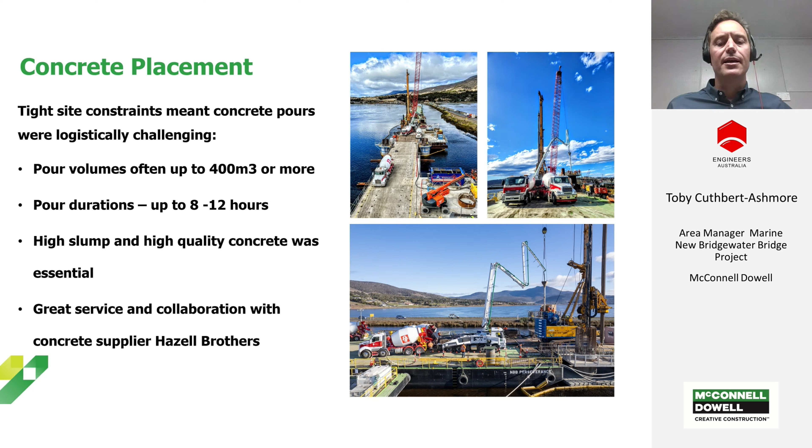The largest concrete pour was on our big 90-metre deep pile, P8L, with 426 cube of concrete placed in total. By this time, the team were finely tuned, pouring all the concrete within 8.5 hours at a rate of 50 cube per hour. The actual logistics of driving concrete trucks on the temporary bridge and barges was also a success due to the hard work and dedication of the McConnell Dowell site teams.

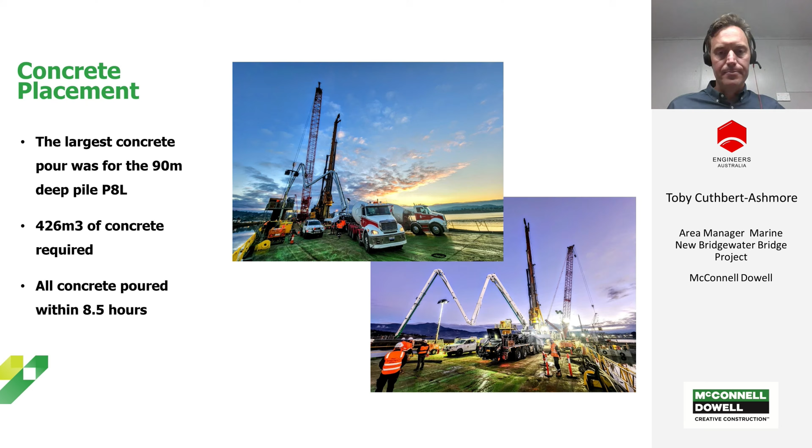Upon completion of the concrete pour, vacuum sucker trucks were used to remove the overpour concrete from the top of the pile. This method was a major win for the environment and health and safety, significantly decreasing the pile breakback that would normally be required for a pile of this size.

I remember the old CEO of the company I used to work for in the UK visiting one of my sites and saying, 'You know, one of these days we'll be smart enough to figure out how to avoid getting people on jackhammers and hammer drills.' Now, I believe this method goes a long way to achieve what he was talking about.

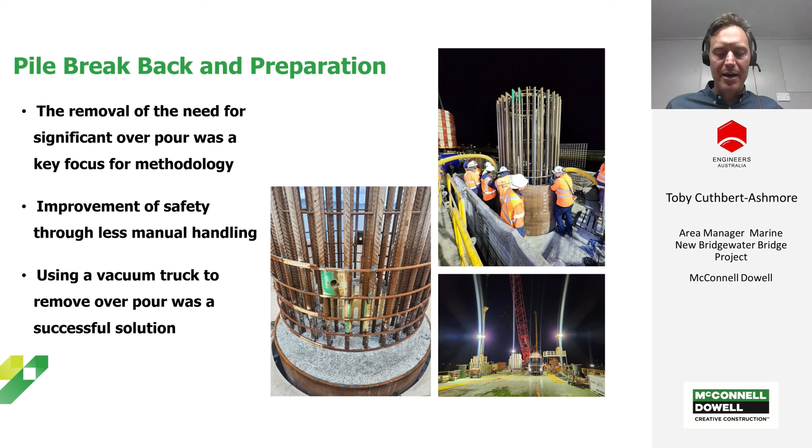Through it all, we finally completed all the piling works in mid-July, with our last pile pour out in the middle of the river. It's fair to say that it was an emotional finish, with so many of the team having been here for the duration, and having put their all into getting across the finish line with a great result. I used to work with an old East London Cockney safety manager whose mantra was...

...that all that really matters in this industry is the banter between mates and people looking after each other. While we all had occasional excitable moments out on site, I think this mantra of looking after each other and making sure that no one was hurt really rang true for the piling team, and we're very fortunate to have no major safety incidents as a result.

Given all the challenges that we went through, collaboration and friendship was strong between different teams, McConnell Dowell and subcontractors, right until the end.

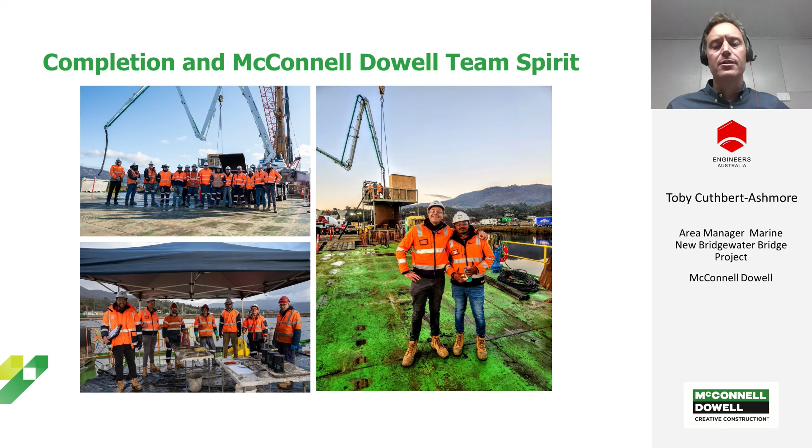So these are just the last few photos and last slide of my presentation, and once again, just a nice way to showcase and celebrate the people involved. Many of the McConnell Dowell team are still on the job, moving on to assist in other areas of the project, such as the superstructure erection and civil works. With works not complete on the overall Bridgewater Bridge until mid-2025, there's still a lot to do. But with a great team doing it, I have no doubt it will be a major success.